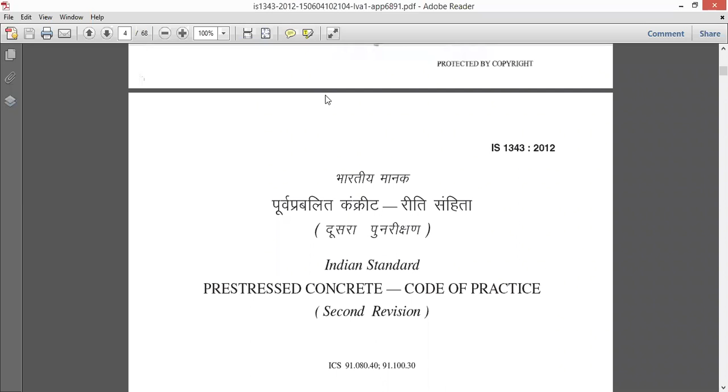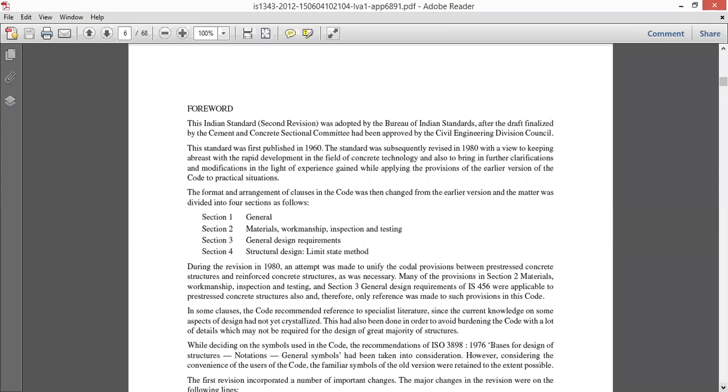So this is what I am asking you to have a hard copy of. Let me go through the contents which are very important for your design. It's an open book, so you can take it to the examination also, like IS 800 2007, which we dealt with earlier.

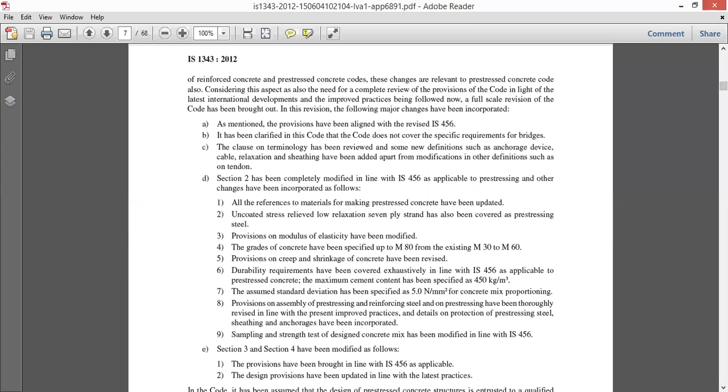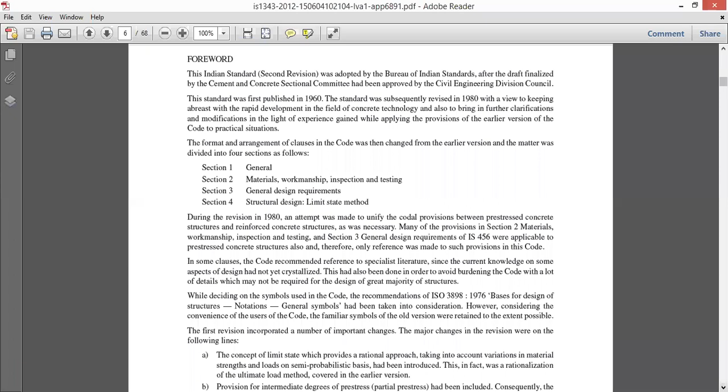Before going to the code book exactly, please go through the main content which was there in this code. The first revision was made in 1980, and then the second revision was in 2012 straight away. There is a small slight variation, small kind of content which has been added in between years also, like in the year 2000, IS 456 2000, which was involved into the code.

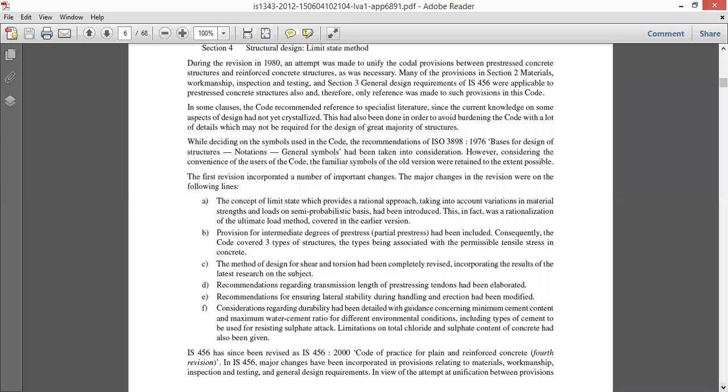Because prestressed concrete structure design is much more related with RCC design, almost 30 to 40% of the content will be the same as IS 456 2000. And one more thing, you have to go through what are the main contents there in the code.

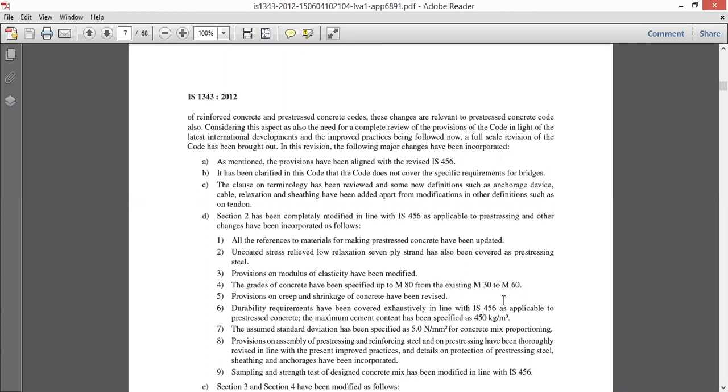When it was revised, the grade of concrete more specified in this code is M80, from the existing M30 to M60. And the maximum cement content which was more specified as 450 kg per meter cube. So these are the minimum requirements to go through this code.

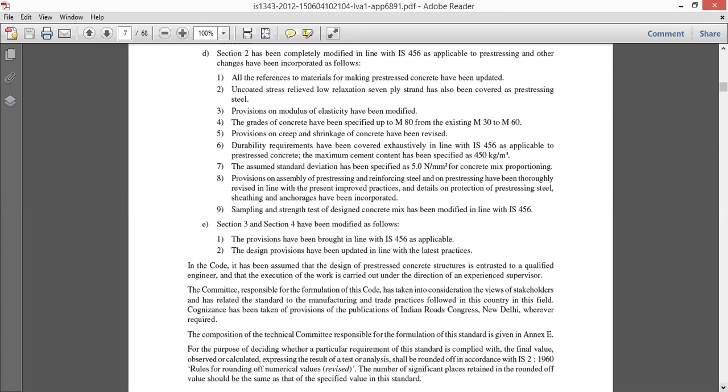And the provisions which were made in IS 456 are also going to be applicable in IS 1343. So try to go back, I mean we'll go to the contents. Yeah, here is the one.

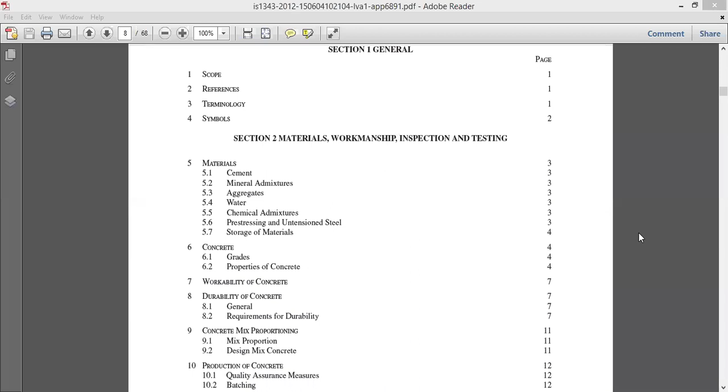And the second section majorly consists of materials, workmanship, inspection and testing. Workmanship is very important because generally people are not much practiced towards execution of pre-stressing elements, pre-stressing technology like pre-tensioning and post-tensioning. Inspection is also one of the important things, and testing of pre-stressing members is also important. So this second section consists of all these things.

So materials in the sense, what are the cements which we are using for pre-stressing, and the mineral admixtures, which is very important. Because you can't attain maximum grades, high grade concretes, without the admixtures. So admixtures play a vital role in generating high grade concretes, by maintaining a proper water cement ratio and by improving the workability. That is the reason why mineral admixtures play a vital role towards increasing high grade concretes and high strengths.

And aggregates as usual, water, chemical admixtures also. So here you have to understand two things: mineral admixtures, which are going to replace the cement, and chemical admixtures, which are added into concrete as a percentage of cement. So mineral admixtures will replace the cement quantity and increase strength. Chemical admixtures are very important to increase durability, ductility, control segregation, shrinkage, water cement ratio, and include retarders, accelerators. There are many chemical admixtures based on various factors which we use. And then there is pre-stressing and untensioned steel.

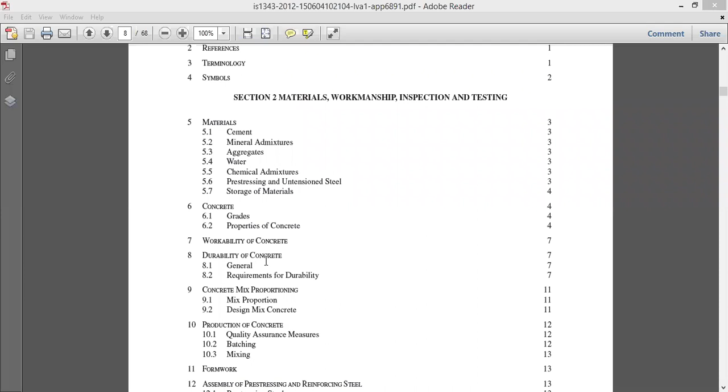And concrete mix proportions - this design is very, very important, mix design. Without knowing mix design, you can't do anything, isn't it? So for high grade concrete, you should be habituated to knowing mix designs. I will show you how you can practice mix design virtually.

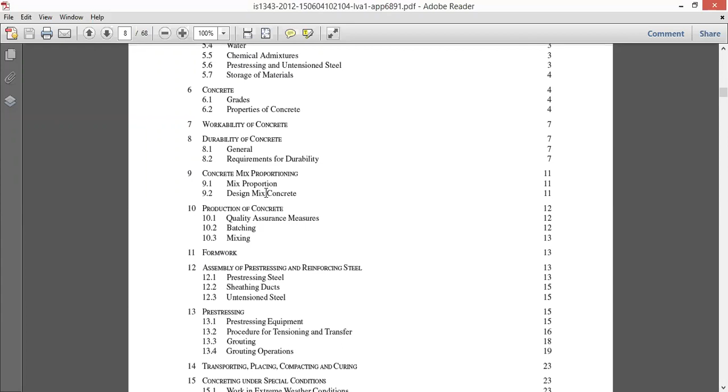And next, the production of concrete, based on quality - and you all know workability starts from mixing to placing, isn't it? So here the quality assurance measures, and batching, and how you are going to mix them - everything you will know from production of concrete. And formwork is also very important. Formwork is nothing but a supporting structure, also called staging.

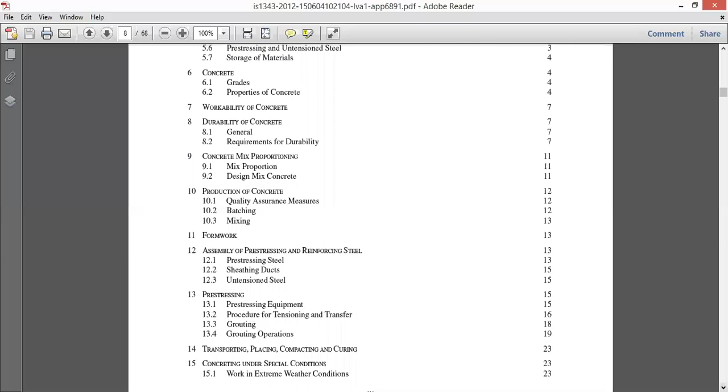Assembly of pre-stressing and reinforcement steel - what is pre-stressing steel, what are sheathing ducts, profiling pipes and mortar - what sheathing ducts are, what untensioned steel is, everything we'll know. Coming to pre-stressing, what pre-stressing equipment is available, what is the procedure for tensioning, how to transfer load from steel to concrete, and what is grouting and grouting operations - all this you can know from the pre-stressing topics, along with transporting, placing, compacting, and curing.

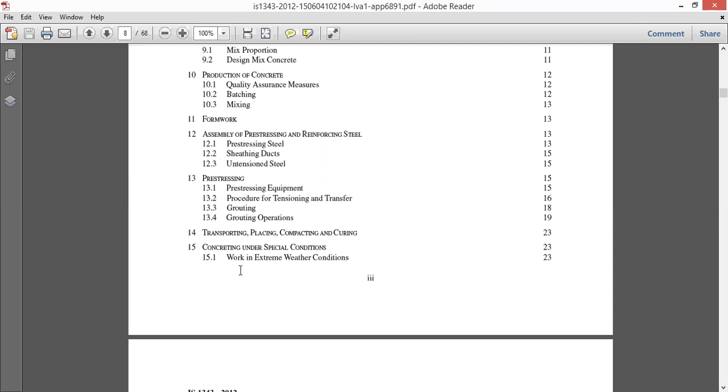So all this comes under workability of concrete. And concreting under special conditions, like working in extreme weather conditions, how you have to approach the concrete. And what are the sampling and strength tests of concrete mix? What is the acceptance criteria? How you can accept the concrete based on its factors and design considerations. And how you are going to do inspection and testing of the structures - everything you will know from the materials section.

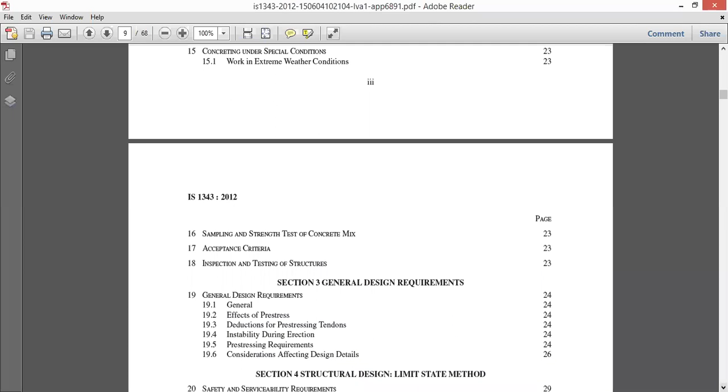And the next section is general design requirements. Here exactly you will come to know how to design pre-stressing elements, like the effects of pre-stress - how pre-stress is going to affect the structure in terms of losses. So here we clearly study the effects of pre-stressing, the deductions of pre-stressing tendons and what we are going to minus, instability during erection, pre-stressing requirements, and considerations affecting design details - all this you are going to know from the design requirements.

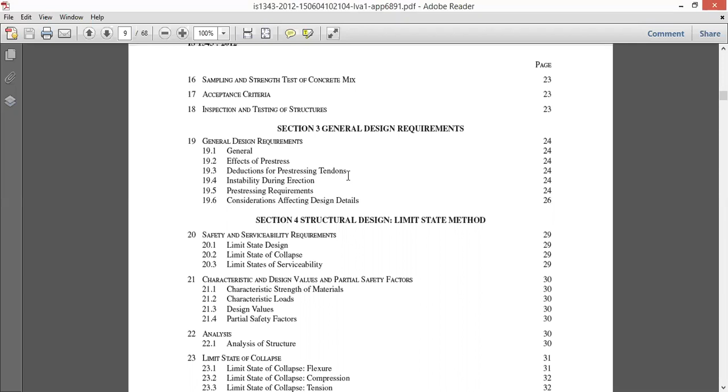And coming to structural design in terms of limit state - here also, even in pre-stressing, you are going to design your structural elements using limit state methodology only.

Okay, there is no other method. So by the way, safety and serviceability requirements are playing a vital role in terms of limit state design - limit state of collapse, and limit state of serviceability, isn't it?

And coming to characteristics and design values in terms of partial safety factors, you have to know the characteristic strength of materials, what are the characteristic loads, what are the design loads, design values, and what are the partial safety factors. These also we have to know in the structural design, right?

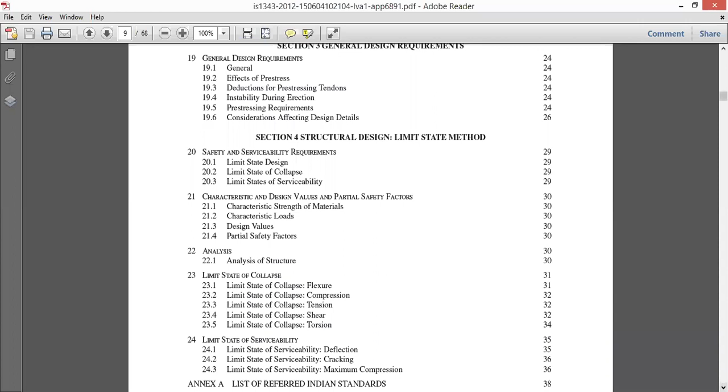And coming to the analysis part, here there is an analysis given in terms of plastic analysis. So here analysis of structures will be shown. I will try to show you when we start design.

And here coming to limit state of collapse and limit state of serviceability, in what way we are going to design the pre-stressing elements - in terms of flexure, in terms of compression, bending, tension, shear and torsion. So we have to know what limit states come under collapse: flexure, compression, tension, shear and torsion. We are going to design these for the pre-stressing elements.

And coming to serviceability, there are many serviceability considerations like deflection, cracking, vibration, temperature, fatigue, creep - all this comes under serviceability criteria, out of which we are going to consider only three as per IS 1343. One is deflection, other one is cracking, and the third one is maximum compression - how far you can compress your concrete member to make it camber, to make it hog. That's how the serviceability considerations will be only three, right?

And what is the list of referred Indian standards where pre-stressing comes into usage from other code books also - it was mentioned in Annexure A and B.

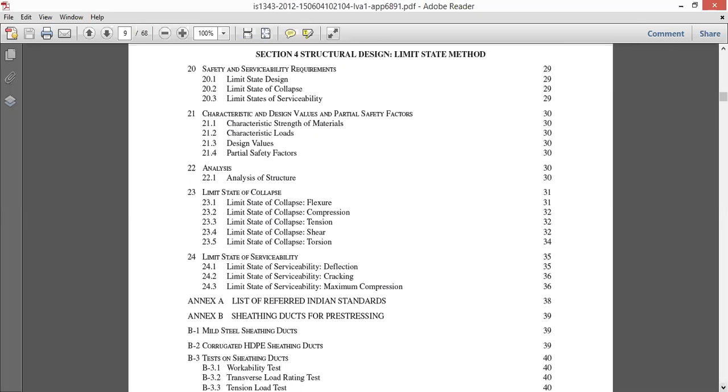I think in steel there are plenty of pages, but in the code book of pre-stressing concrete they are very limited, so you can go through the code very easily, right?

And some more annexures were given, like what materials we have to select for ducting, what workability tests and other tests you can do for structural elements in terms of workability, tension, and water loss. Why? Because water loss leads to shrinkage, isn't it? So there are tests to measure the water loss in concrete, where you can reduce the shrinkage of concrete, right? And what is HDPE pipe?

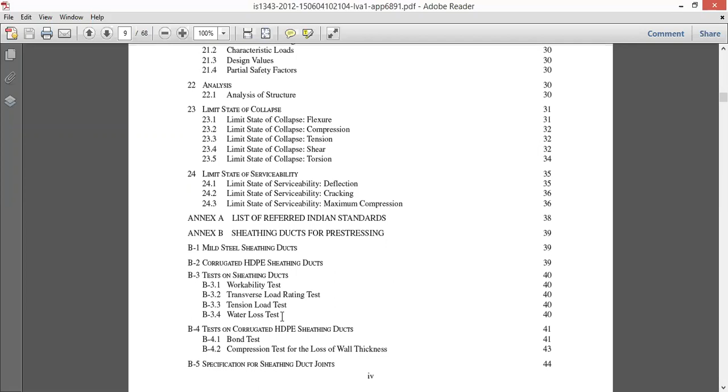HDPE stands for high-density polyethylene material - sheathing ducts. And what is the bond strength with respect to the concrete and the duct? So we are going to test the bond between sheathing and concrete also, and what are the compression tests for the loss of wall thickness. All this will be available in this code.

Yeah, and along with that, there are other testing systems with mechanical anchorages. Why? Because here we are going to use anchorage devices and some jacking system to do the tensioning, isn't it? So here, what are the static load tests where we can do for tendon to anchorage assembly, test specimen, test procedure, how you are going to test.

I mean, pre-tensioning and post-tensioning, everything was given in the code alone - like what are the test specimens, test procedure, measurements and observations, test requirements and all. Not only for the static loads, but also for the dynamic load test and the load transfer test. So it was clearly given.

And the final annexure, which is moment of resistance for rectangular and T sections. Moment of resistance in the sense your beams or whatever structural elements, it should have more resistance towards moment, more resistance towards bending, isn't it? So majorly the elements will be rectangular and T sections, and here a few moment values are given in the annexure. That is how the code book contents are clearly described.

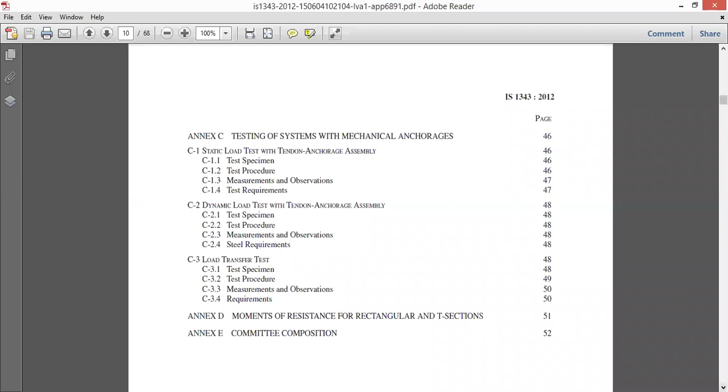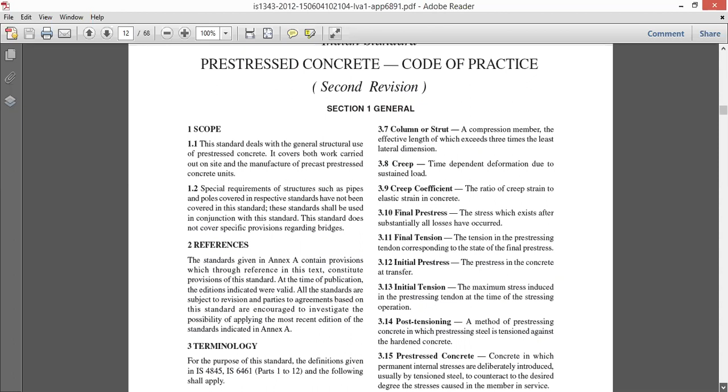Okay, so once you have your code book, let me show you what is the scope, the terminology, and all these definitions, which are very important.

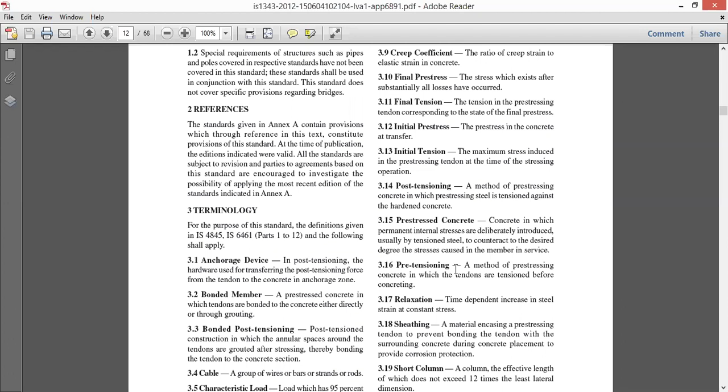So what is anchorage device? What is bonded member? What is bonded post-tensioning? What is cable? What do you mean by initial pre-stress, final pre-stressing? What is pre-tensioning? What is post-tensioning? What is relaxation? All these terminologies will have a straightaway definition. So instead of going through Google, you can just go to the code book where you will get each and every definition from the code alone, right?

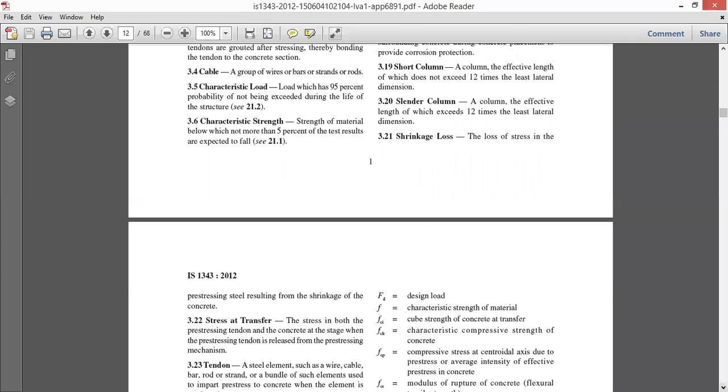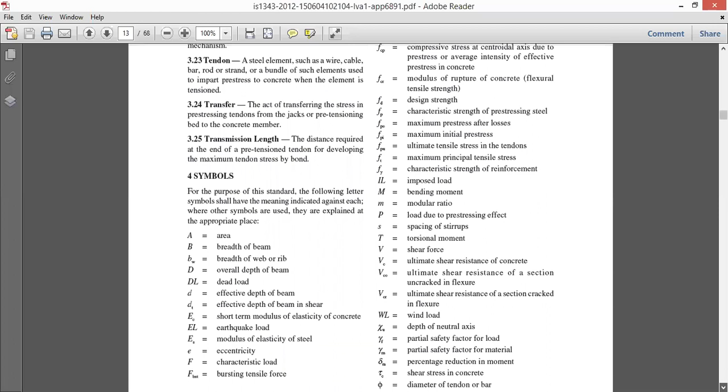Okay, if you bring your code book, I can start showing you each and every part of this. Symbols are also very important, so just go through the symbols. By that, it will be very easy for you to understand the design formulas and the materials, everything. Once you have your code book, I can start showing you.

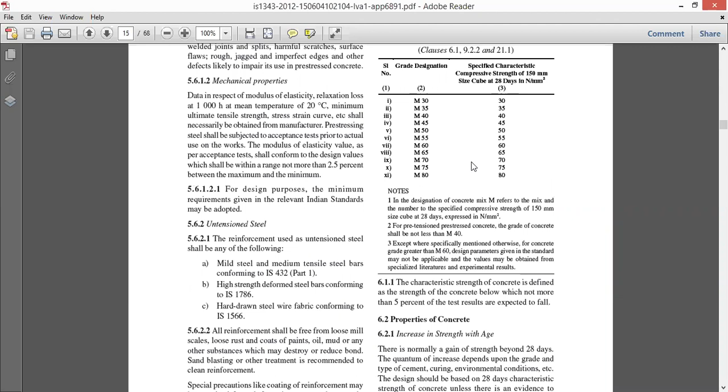If you go through IS 456:2000 for RCC design, your mix design starts from M10, isn't it? M7.5 is also there. But in pre-stressed concrete, your mix design starts from M30 to M80. Why? Because you can't go for normal strength concrete for pre-stressing elements.

It should be high strength concrete, where high strength concrete starts from M30 grade. I think there is no straight proportion for mix design from M30 onwards, because for M20 you can tell 1:1.5:3, and for M25 you can say 1:1:2. But for M30, can you tell the mix proportion? No, you have to do mix design by adding some admixtures into it. Then only you can achieve the high strengths, right?

So knowing mix design from M30 is very very important. I think even when you did concrete technology lab, maybe you went through M15 grade mix design and M20 mix design, but you don't know how to do the mix design of M30, M35, M40 like this. High strength concrete under one category, ultra high strength concrete under another.

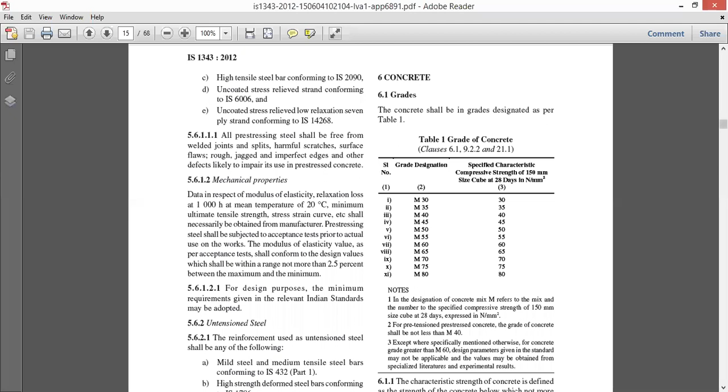Okay, so these all you should know, for understanding this PSC subject, and all the strength values, everything. I will try to show you all this once you have that.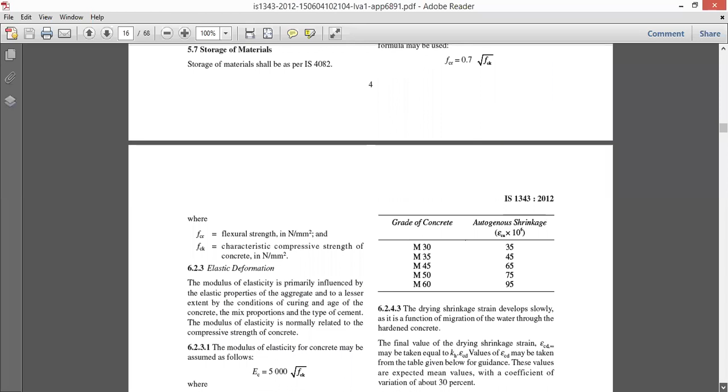And in the previous class, how to calculate the concrete Young's modulus -- there is a formula, isn't it? Concrete Young's modulus always depends on the grade of concrete, right? So 5000 root FCK, I think this formula you all know earlier. FCK stands for characteristic compression strength of concrete. Based on the grade of concrete, your Young's modulus will vary, right?

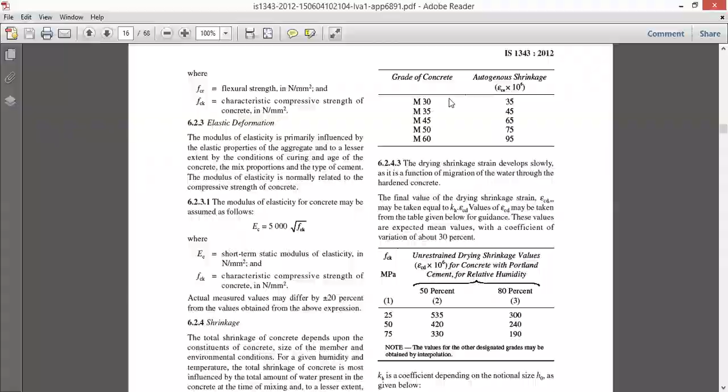Now I will show you how to learn mix design virtually. Let me stop this and let me share my website.

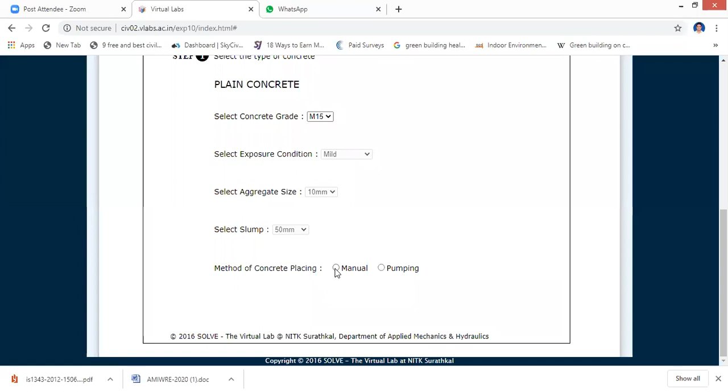Exposure, what kind of exposure? Mild exposure. The aggregate size, let's click with 10 mm. Slump value, let me go with 50 slump, 5 centimeter slump. Method of concreting place, I want to place it manual, then right.

Okay, what else? Calculate the target strength of mix proportion. After selecting your grade and exposure, you are going to calculate the target mean strength, isn't it? So what is the target mean strength formula? FCK plus 1.65 times of the standard deviation, right?

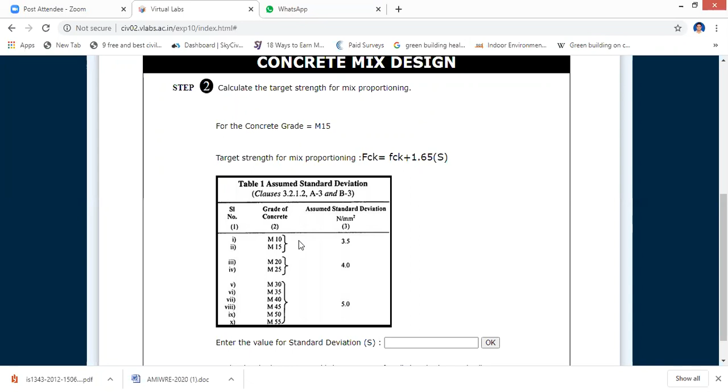So what is FCK? It is based on the grade. M15, 15 will be your FCK value. 1.65 times of S. S is the standard deviation, which you get from IS 456 2000, or there is a mix design code based on aggregate concrete, 10262. So even from there also you can get the values.

So if it is M15, what is the standard deviation? It is 3.5. So let me type 3.5. Okay, then okay.

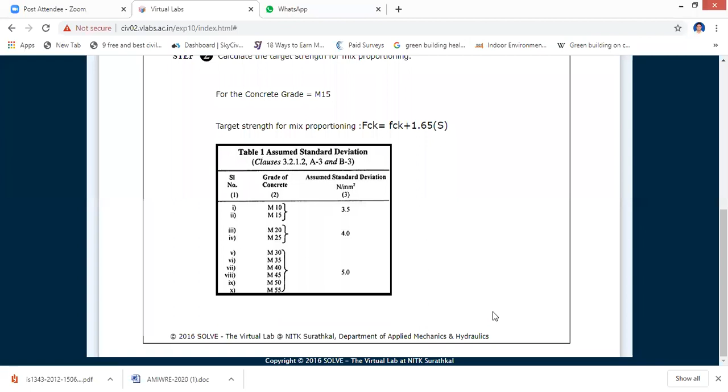So it's calculated. M15 grade, its target mean strength is 20.775. So what is it talking about? Your concrete should not be less than 15 Newton per mm square, and it should not be more than 20.775 Newton per mm square. That means you are targeting your M15 grade concrete to 20.775 MPa. It should not be more than that.

If it is more than that, it says your cement content is more, which leads to more strength. So it should be in between 15 to 20.775 only.

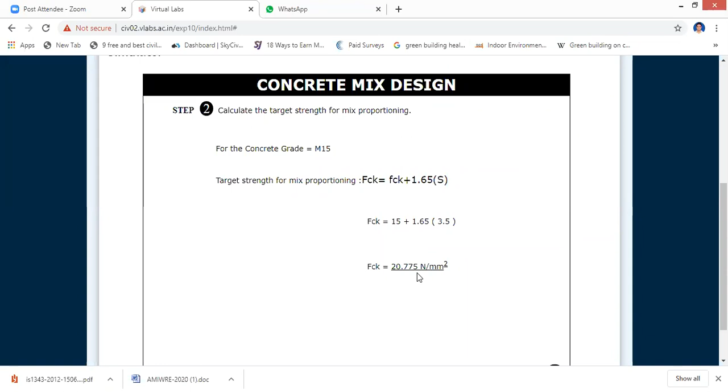So after getting the target mean strength, then you have to click and it will show you water cement ratio. Calculate the water cement ratio. For the exposure mild, water cement ratio is 0.6.

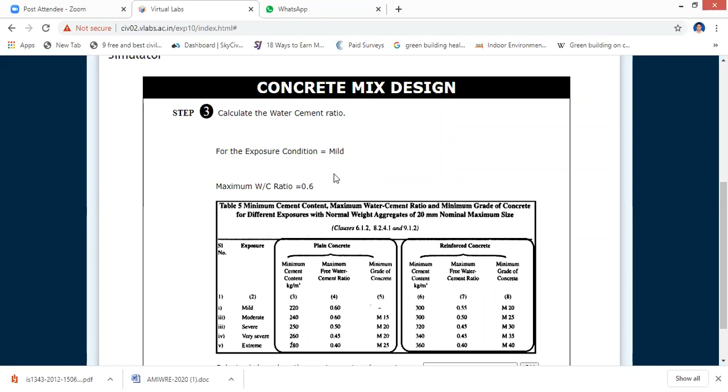So it's based on exposure, right? Then select water cement ratio based on the requirement and experience. So here we have to select the water cement ratio based on the grade, and based on the exposure. So when we choose the plain concrete, what is the exposure?

Let us consider mild, and minimum grade is not given. If it is moderate for M15 grade, it is 0.6. Let me take 0.6 as per the code. Then okay. See, this is the procedure.

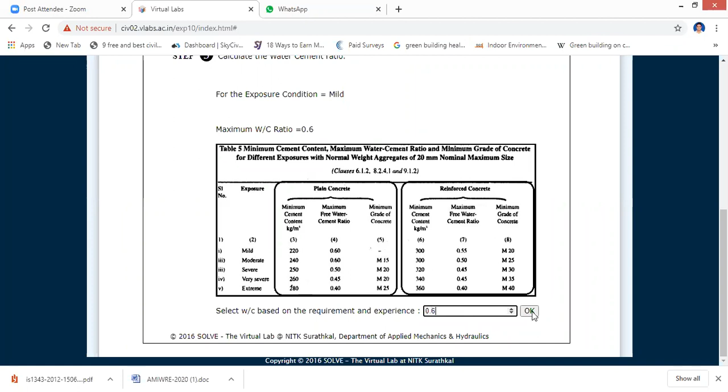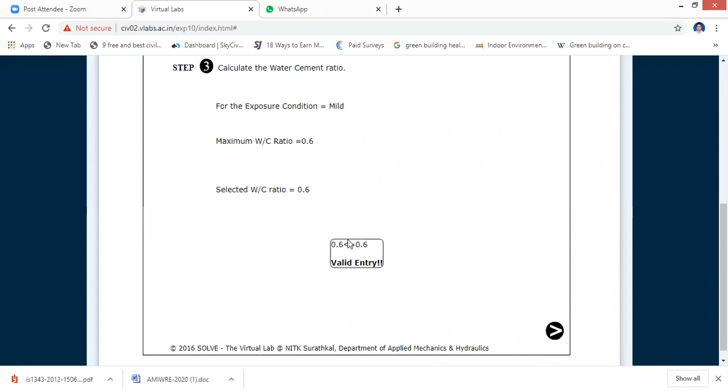If you know how to start mix design step by step, by that you can teach anyone. It's steps on steps, we will follow one. So for the mild exposure, maximum water cement ratio is 0.6, and I have selected 0.6. So valid entry, which is 0.6, is equal to 0.6.

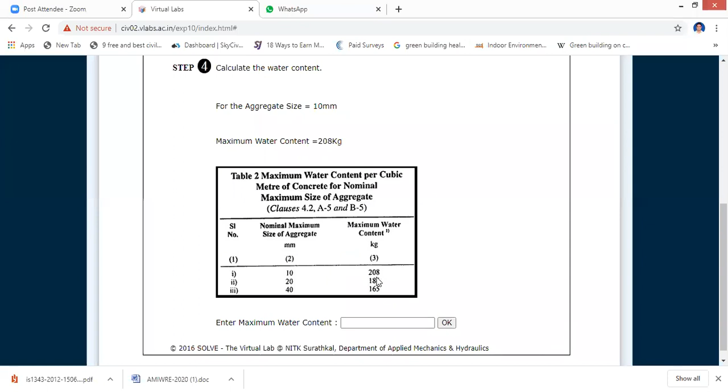Next, for aggregate size 10 mm, maximum water content is 208 liters or 208 kgs, right? So that's the maximum water content per cubic meter of concrete for nominal maximum size of aggregate. We have to consider this. So as we selected the size of aggregate as 10, the maximum water content is 208. Let me go with 208 as usual and then click OK.

See the slump we chose, 50 mm, water content is 208, and addition of super plasticizers reduces water content up to 20%. Then enter percentage reduction in water content. If you want to reduce water content by adding super plasticizers, you can reduce it.

Why? Because as I told you, as grade goes on increasing, water cement ratio decreases, isn't it? So when you start adding chemical admixtures into concrete, you can reduce the water cement ratio. Because our water cement ratio is huge, 0.6. To reduce the water cement ratio and increase workability, you can add super plasticizers, up to a maximum of 20% and above.

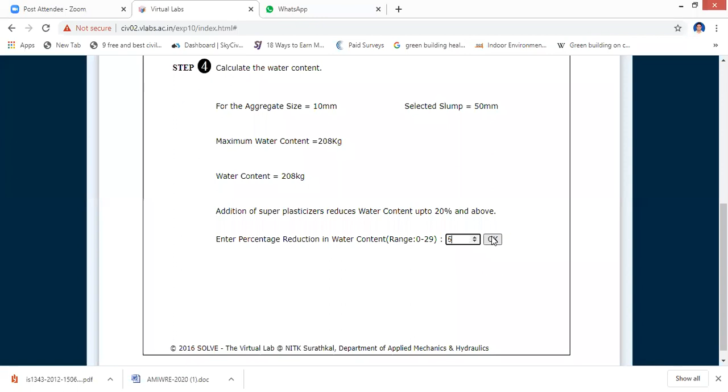So by that you can select the range in between 0 to 29. Enter percentage reduction in water content, so where I am selecting it as around 5%. I want to add 5% of super plasticizers into it, where it improves workability and reduces the water cement ratio. So the maximum water content is 197.

The water content earlier without any admixture was 208. By adding super plasticizer into concrete, the water content was reduced to 197. Right? So like this, and then cement content. The cement content will be calculated as per the water content and the selected water cement ratio.

So from Table 5, IS 456 2000, for the selected exposure mild, the minimum cement content and maximum water cement ratio apply. The 329 kg per meter cube is the cement per cubic meter which we are using, which is greater than 220, so it's valid.

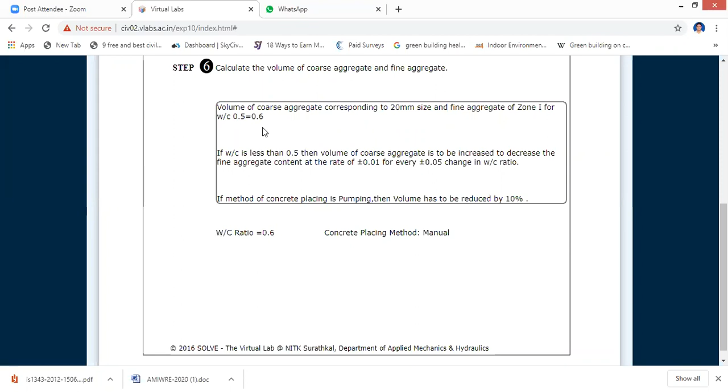The volume of coarse aggregate corresponding to 20 mm size and fine aggregate of zone 1 is 0.5 to 0.6. Water cement ratio is 0.6, volume of coarse aggregate is 0.62, and volume of fine aggregate is 1 minus volume of coarse aggregate, which is 0.38.

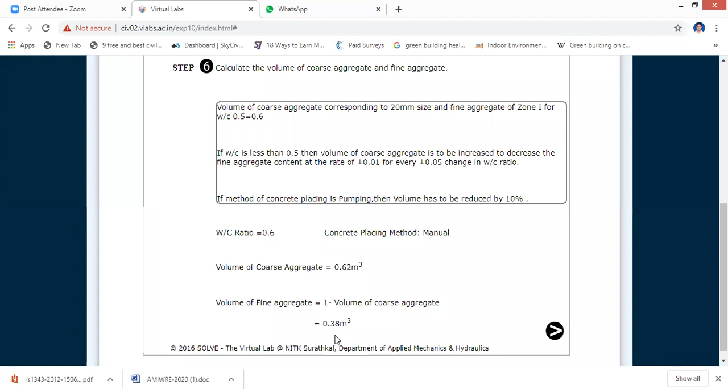We all know this, why? Because it's 1 cubic meter, so we have to subtract all other values from it. Then this is the mix calculation.

Specific gravity of cement is 3.15, coarse aggregate is 2.74, fine aggregate is 2.7, and admixture is 1.145. Mass of water is 197, cement is 329, admixture is 5. Based on that, it calculated all the content required to design 1 cubic meter of M15 grade concrete.

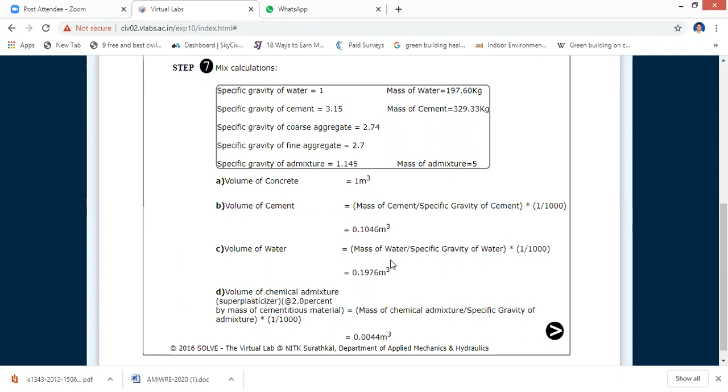This is how you can learn, step by step, and it will be very easy. Finally you end up with the volume of all aggregates, and you get the final mix proportion.

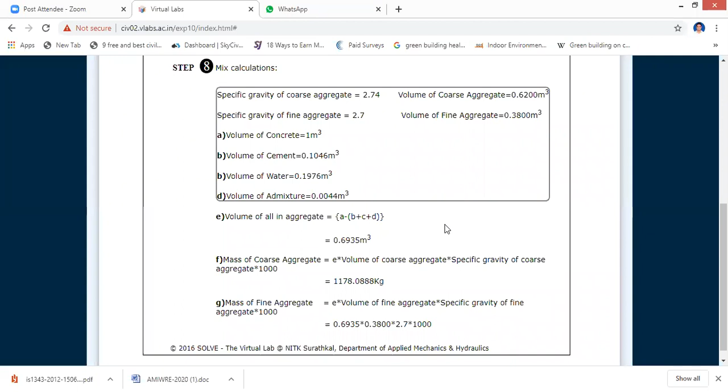This is the software developed by NIT Surathkal. By this you can practice doing mix designs of all grades. Let me show you the final result.

This is the mix proportion: cement, fine aggregate, coarse aggregate, water, and chemical admixture. For 1 cubic meter of concrete, you have to add 5 kgs of admixture, water this much, coarse aggregate this much, fine aggregate this much, and cement this much. And this is the proportion, 1 is to 2 is to 3.

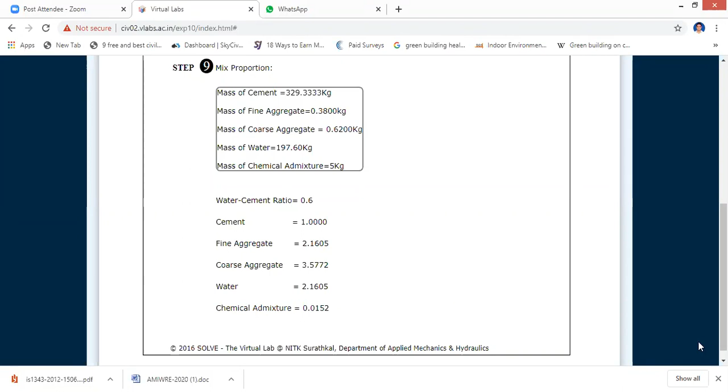Let me show you once for RCC, because we use only RCC for pre-stressing elements. See the grades, it goes till M55. You can click M55 and go with the exposure. There are a lot of exposures for M55 - mild, moderate, and so on. You have to start clicking through them, then you can learn even mix design till M55.

Once you know how to design, then you can go for experiments and check whether you are getting the same strength or not. This way you can learn virtually too. This is what I would like to show you guys.